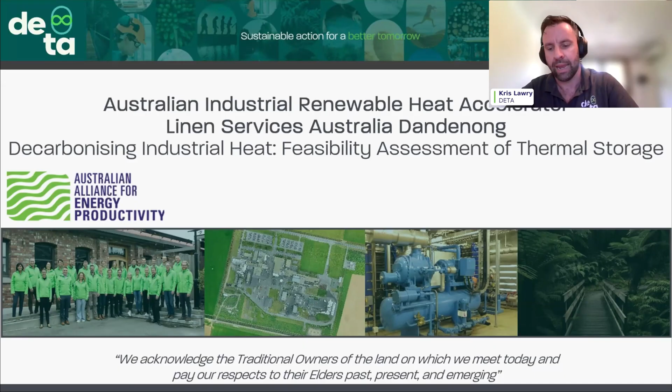So we were engaged by Linen Services Australia to complete a feasibility study on thermal energy storage. And that was funded through, as Laura mentioned, the Industrial Renewable Heat Accelerator, which has funded a number of studies across decarbonising industrial heat. And so, yeah, very thankful for the accelerator for providing us with this funding.

I guess one of the key things that maybe we should talk about just quickly is why are we doing this? The key reason that Linen Services Australia is interested in this from one perspective is de-risking the cost of their industrial heat. As we're all aware, the price of natural gas has been increasing over time. And we experienced a large price shock during the Ukraine war, and we may be looking at another price shock coming with the current conflict in Iran.

And there is a lot of talk in the media around the price of electricity increasing, but the rate at which the price of electricity is increasing is nowhere near the same as natural gas. And the key thing to point out is that the midday price of electricity has been continuing to fall. So that is what's driving this. So what can we do to help industrial heat users like Linen Services Australia to access that low-cost midday electricity?

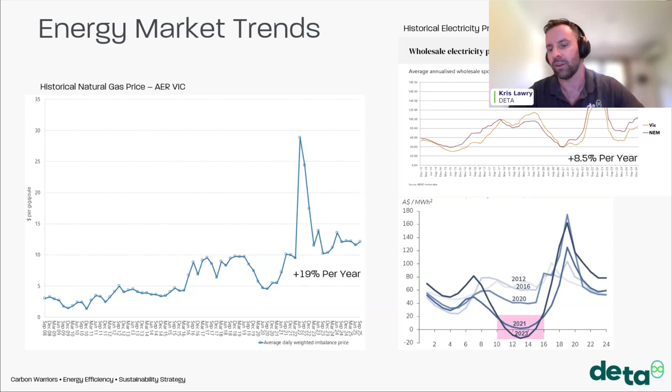In addition to the spot market for electricity decreasing in the middle of the day, network companies are also identifying that they need to try and motivate customers to move to midday electricity consumption away from peak electricity. Linen Services Australia is located in Dandenong, just south of Melbourne, in the United Energy Network. And the United Energy Network is now offering a published tariff, which is really supportive of these types of projects. So going from their standard tariff, which is around 7 cents per kilowatt hour,

to a new tariff, where the network charges are around 0.7 to 0.9 of a cent per kilowatt hour, as long as you avoid that peak demand time of 4 to 9 p.m. at night. So again, all of the things are starting to align that if we can use electricity during the middle of the day, this can offer significant cost benefits and also provide additional stability to the grid in the middle of the day, where grids start experiencing things such as minimum system load.

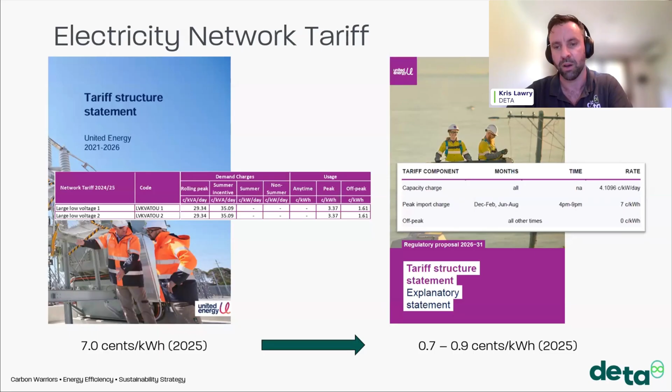So the first thing that we did with this project was we wanted to map out what all the energy use is on site. So we completed an end-use breakdown of the natural gas on site, both in terms of the amount of energy used by each of the different processes and also when it's used on site.

So the key thing to note here is that the Linen Services Australia Dandenong facility uses a significant amount of natural gas directly in their dryers. Natural gas is also used in boilers to produce steam, but that's predominantly only used in the washing processes. And that is a limiting factor, because it means that we can't electrify a lot of those dryers before they are converted to steam dryers.

So there are direct natural gas dryers, and there are steam dryers. Both have very similar efficiencies. So for the Dandenong site, it is definitely a drawback not using steam dryers on site. But other facilities definitely do use steam dryers.

The other thing to point out is that the facility predominantly operates during the daytime. So it operates from 6 a.m. in the morning through to 10 p.m. at night for the bulk of their energy consumption. And that is 5 days a week plus a half day on a Saturday.

And in terms of electrical capacity, the site was found to have significant available electrical capacity. So it's got 3 MVA of electrical connection, and they're only using around 1 MVA, and that's only generally used during that 6 a.m. to 10 p.m. period. And that'll be of interest when I talk about electric boilers near the end as well.

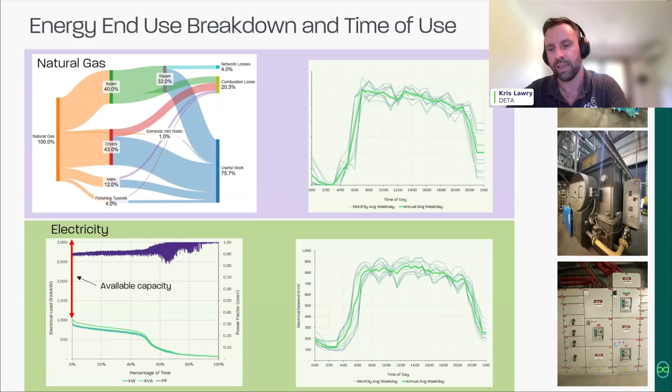So the first thing was we looked at electric thermal energy storage, or eTES. We looked at a range of different technologies, but we looked at the 3 main Australian manufacturers, so Graphite Energy, 1414, and MGA Thermal. They're all based on very similar technology where we're heating a solid medium up with electricity at low voltage, so 415 volts for all of the designs that we looked at, and producing steam for the site at 12 bar. So very much within the temperature range of these units. And the plan is to keep the existing natural gas boilers running in parallel.

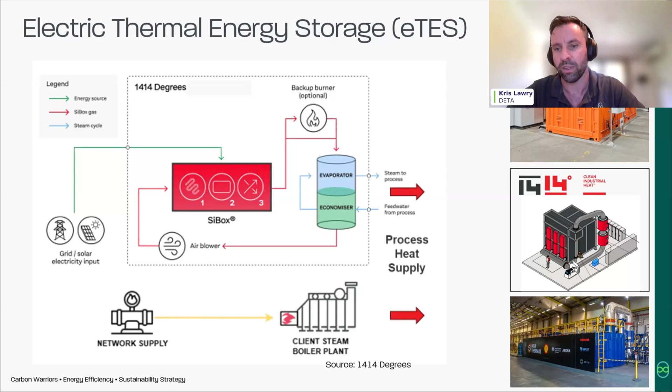In terms of footprint for the site, the eTES units do take up a significant amount of footprint compared to a standard natural gas boiler. So if you look on the diagram here, the traditional boiler house is located down here, and that has 2 natural gas boilers located inside of it. If we're going to install an eTES unit, it would need to be installed either out here in this footprint of 11 by 20 meters, or even over the back here in the 17 by 32 meter slot.

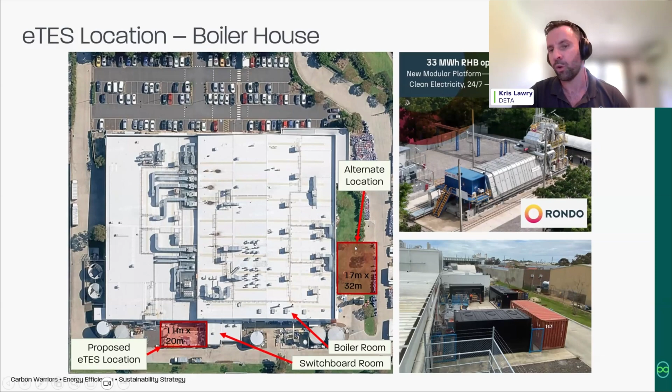As you can see, they are a fairly significant unit. So this is an example of a Rondo unit that was installed in Thailand, and that is a 20-foot shipping container at the end of the unit. So yeah, it is a significant footprint, and so having space on site is important. It is probably worth noting that these Rondo units can go vertically a lot higher, so you may not require much more footprint than this to do 100 megawatt storage, or maybe even 150 megawatt storage, but it is a lot larger than what we're normally used to in terms of natural gas steam boilers.

So we completed some very detailed analysis of the AEMO spot rate, the environmental charges and the regulator charges. And what we found is that the average electricity price came out to around 1 cent per kilowatt hour, which is really competitive. And the key thing to note here is that most of that actually comes from environmental charges, largely from VEECs. So if you're in states that don't have those types of state certificates, then this number may be lower.

But the key thing is that Victoria does have a very low spot rate, so it does tend to balance out. And when you compare that to the price of natural gas, which we found to range between 5 and 15 cents per kilowatt hour, you can see that the combined price of electricity can be well below the price of natural gas. And if we saw that natural gas price increase, we could potentially be below the natural gas price 50% of hours throughout the year.

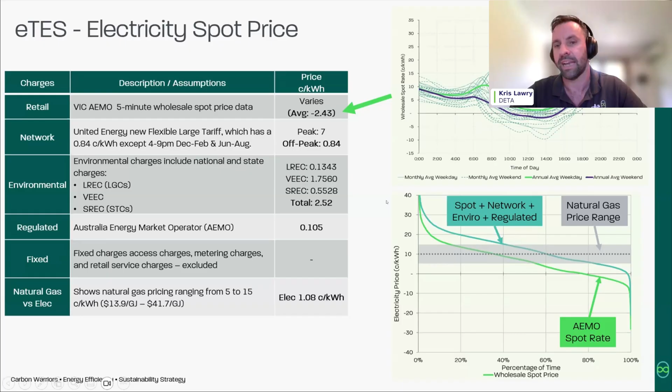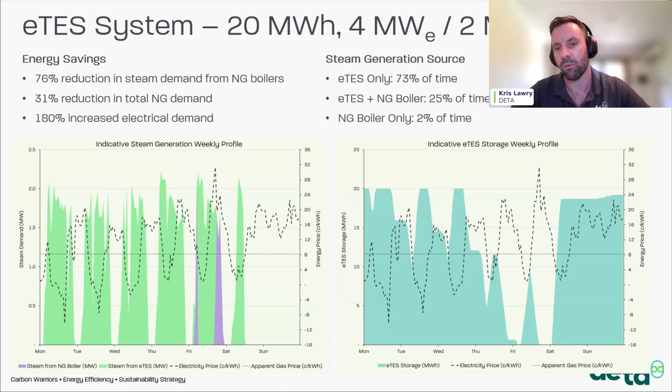The last thing on the thermal energy storage to talk about is the payback period. So where the rubber meets the road, where everyone's really interested, is how much does it cost and what's the payback? So for the unit for the site, we roughly estimated around $12 million all in, everything installed on the current market price, including electrical upgrades. And that results in a payback period a lot longer than most companies are willing to accept. 18 to 20 years is kind of where we are without any government funding.

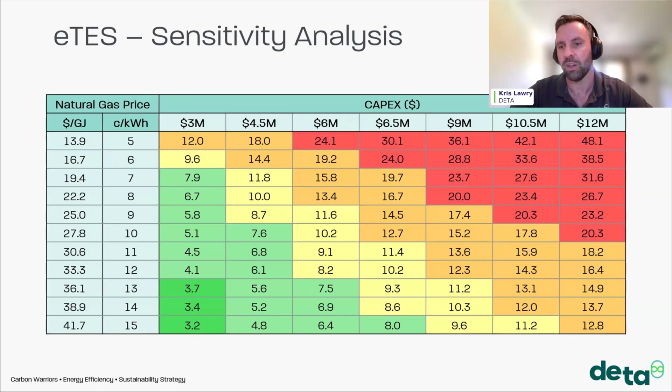If you looked at the perspective where, for example, we got 50% co-funding from ARENA, you're down closer to that 10-year mark. And then if we are able to get efficiencies of scale, or the price of natural gas increases, then all of a sudden we're getting closer to that 5 to 7 year period. So it just really depends on what your outlook for the market is. These economics significantly change if you're also on LPG as well, where the price of LPG is much higher.

So overall, we found there's a number of different factors that contribute to whether eTES is suitable for different sites. So this is a little bit of a cheat sheet for people to quickly run through to understand whether they think it's suitable for their sites. So how much steam are you using? How consistent is it? It's not well suited to industries like, for example, a milk processing facility where you're only operating 6 or 8 months of the year. You really want the plant to be running very consistent.

High price of natural gas always helps. Low price of electricity, favorable network tariffs, and then that's obviously weighed up against environmental charges depending on what state you're in. And then, the site fit. So have you got the space to actually take the eTES unit, and have you got the availability for the electrical capacity? And then last of all is ARENA funding, or state funding, even in New South Wales now.

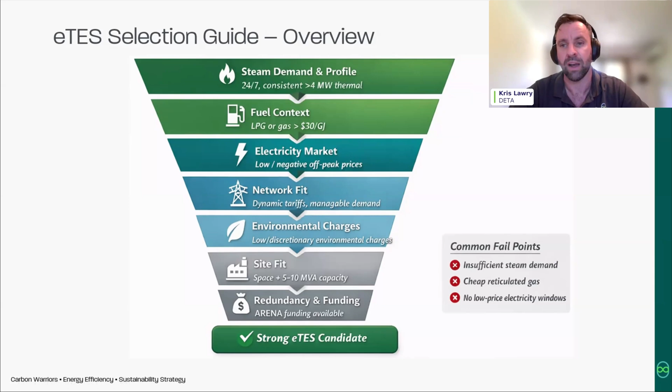My last slide is just talking about one other option that we looked at for the site. So we also looked at an e-boiler. And the reason we looked at an electric boiler for this site is because the site's predominantly operating during the day. As Kris Nelson mentioned in his original slide, electric boilers do come with a much lower capex cost. So can we offset a large amount of the natural gas at a fraction of the capital? And the answer is yes, because they're operating predominantly during the day.

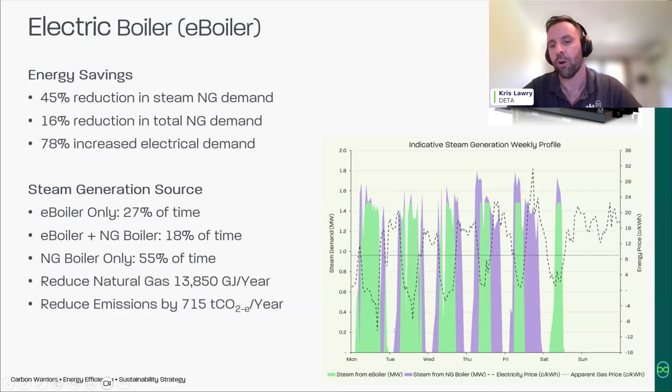And so what we found is that by installing an e-boiler, we could offset 45% of the natural gas, 16% of the site's total natural gas, and we can do that for a fraction of the cost. And that's what it would look like in terms of that operating profile as well, and when it's operating during the week.

And the key thing here is that the actual estimated cost of the electric boiler installed was somewhere around this $1 million mark, because the site already has sufficient electrical capacity to take the boiler. They've already got the footprint inside the boiler room very close to the steam manifold. So the cost of install becomes quite low. And so, the payback can be somewhere around this 2.5 through to 4 year period, which is well within most companies' expected payback period.

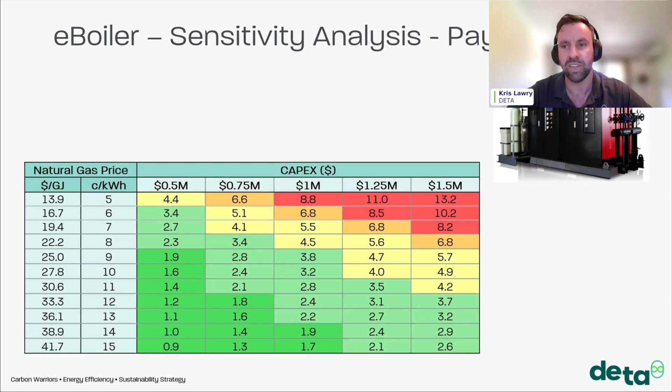And if we can drive that down even further to $750,000 for the installation, we can get under 2 years. So that may be an option if we're not looking for complete decarbonisation. This may be an option to get them started on this journey while they go through the process of replacing dryers with steam dryers over time, and it might be a good interim step.